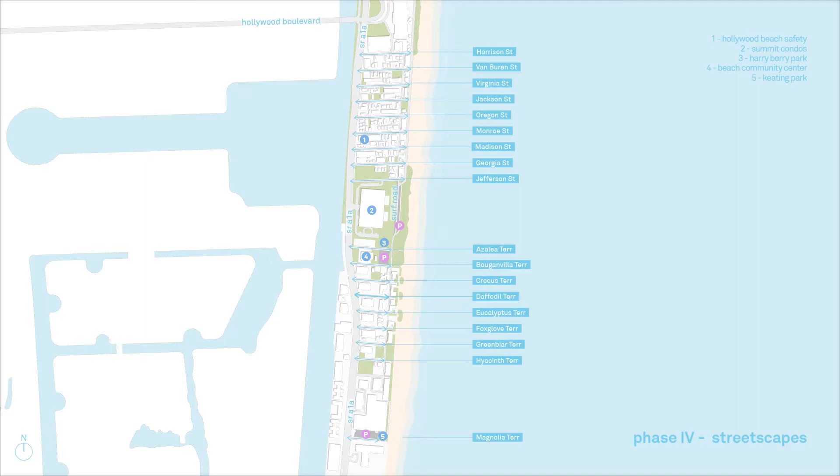Hello and welcome to the Daffodil Terrace undergrounding of overhead utilities and streetscape beautification conceptual design. In this video, we will be highlighting the upcoming changes occurring on this street during the Phase 4 undergrounding of overhead utilities and streetscape beautification project.

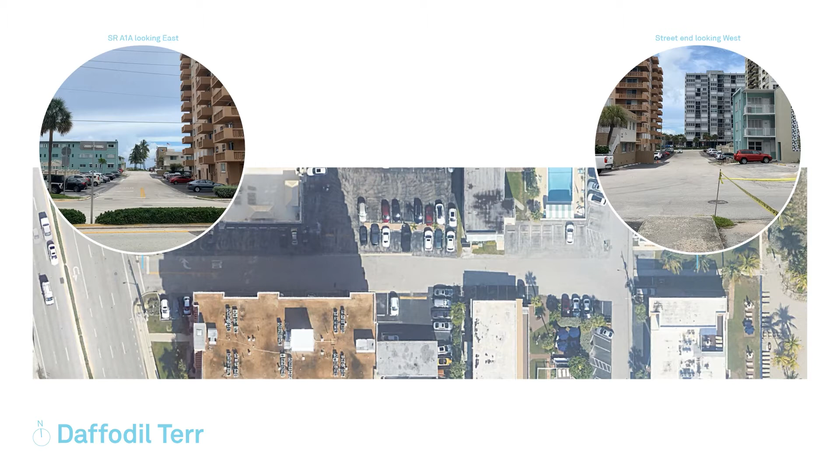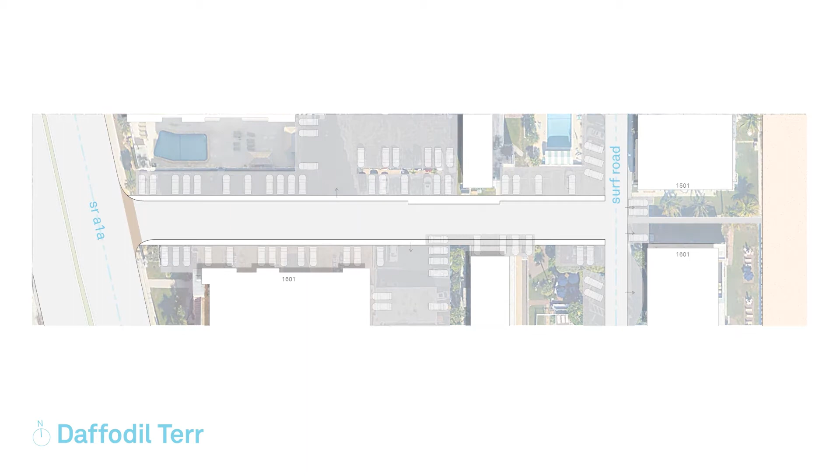These images illustrate the existing conditions both at the street and the street end. The information provided is based on conceptual designs and is subject to minor revisions during the engineering, regulatory, and construction design phase.

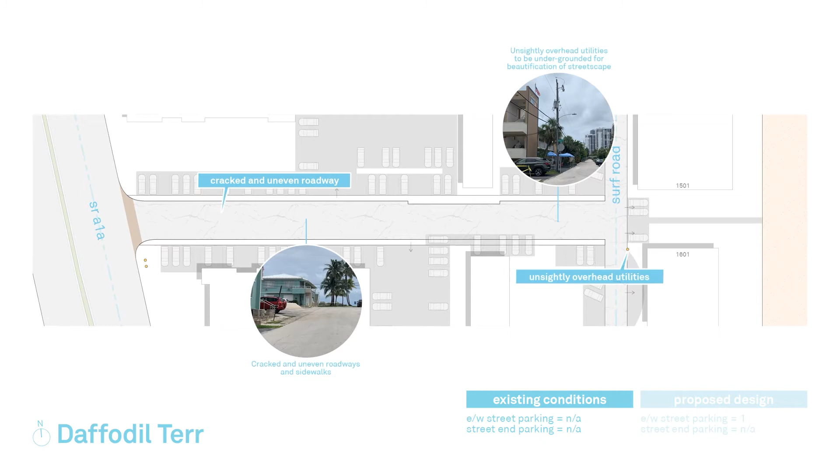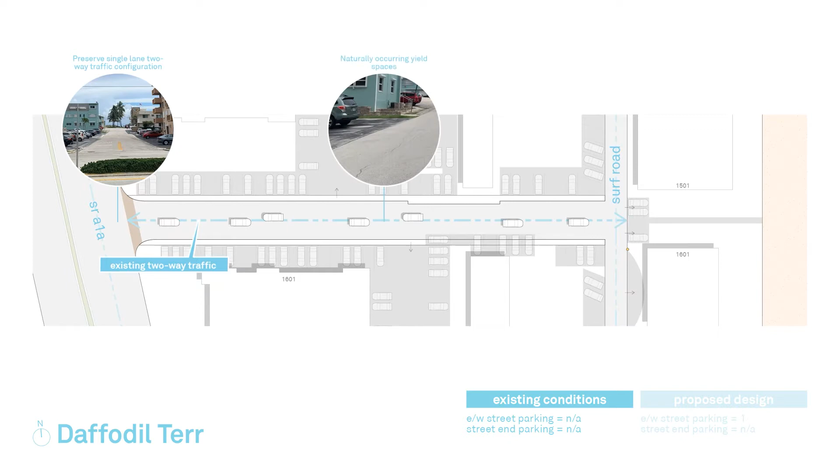Due to the nature of implementing the undergrounding of overhead utilities and streetscape beautification, the parking spaces, regulatory agency oversight, public lighting, and landscape improvements will be markedly different than the current conditions as seen today.

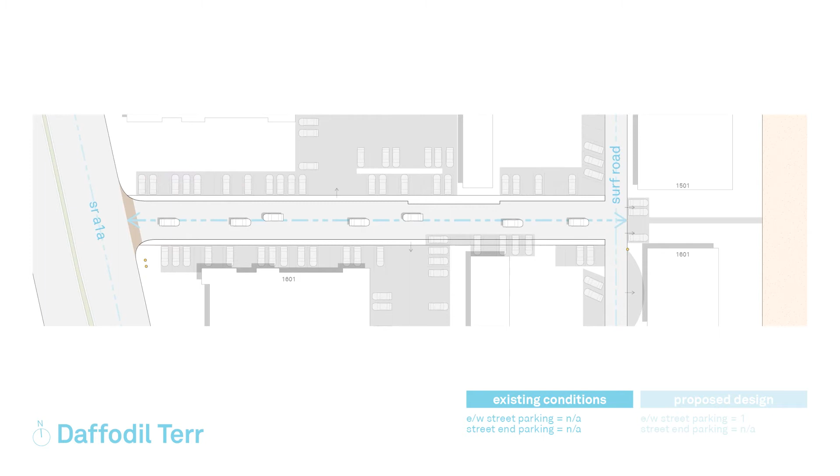Each street is a custom design based on existing conditions. The proposed design will incorporate newly constructed sidewalks and roadways with brand new paving that will extend onto the street ends.

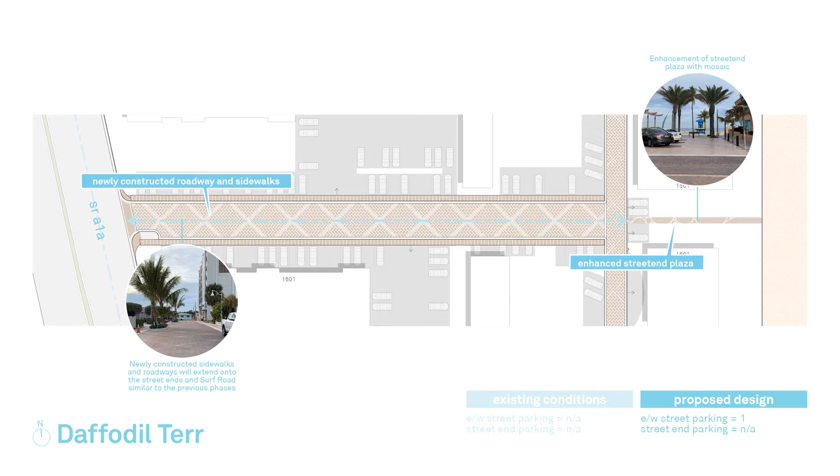The photos shown depict images of the completed streetscape from previous phases 1 through phase 3 and are an example of the same types of lighting, hardscape, landscape, and streetscape improvements that will be implemented on this street and the entire phase 4. As requested by the community, the current traffic pattern is being maintained, i.e., the two-way traffic with

a single lane in each direction and parking on both sides of the street.

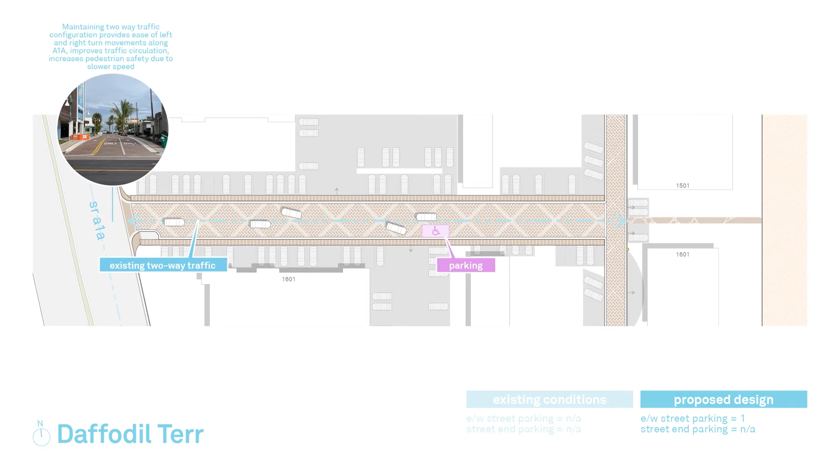Existing driveways will act as natural yield spaces, an area where a car can pull into to allow another vehicle to pass by.

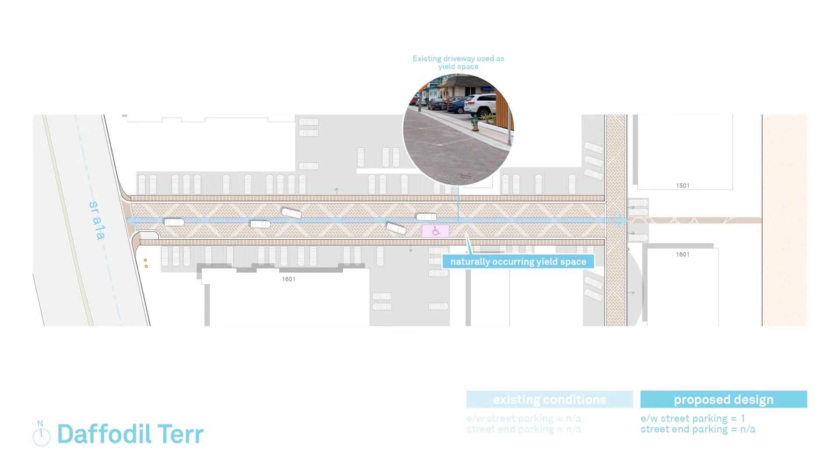Encroachments into the row have been addressed by the city passing an ordinance reducing the amount of space required on a private property for parking, i.e., if there is 16 feet and 0 inches in a perpendicular configuration and or 8 feet 6 inches for a parallel parking space, then these spaces will continue to function as parking on private property.

In addition, if private property owners have wheel stops or small garden walls which can be reconfigured to allow for additional private parking, CRA staff will meet with those private property owners.

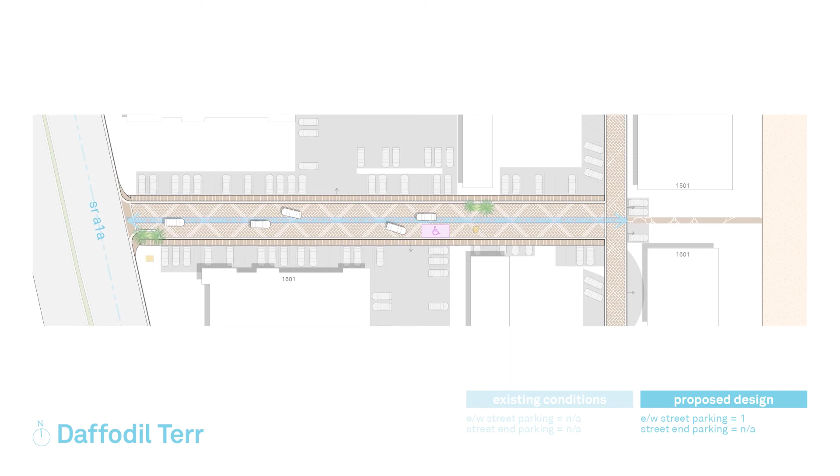The undergrounding of overhead utilities will result in utility transformers that will be placed in strategically located landscape islands to optimize service points to adjacent properties and minimize the loss of public parking spaces.

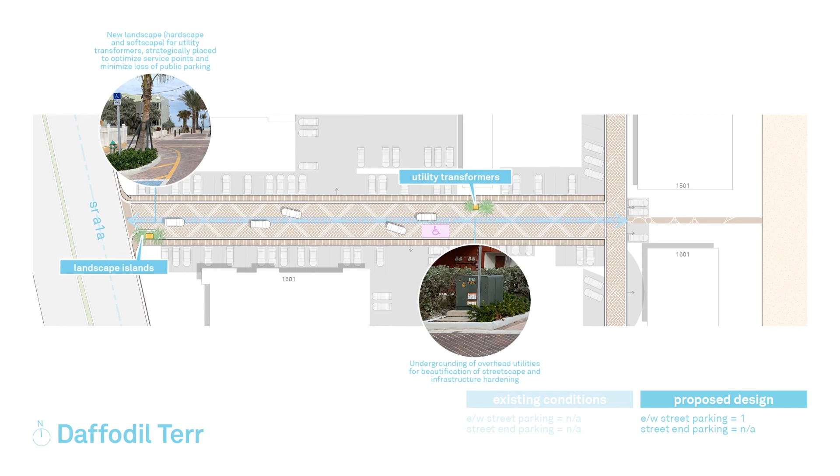Street lighting will also be upgraded to LED marine turtle-friendly lights as seen in the previously completed streetscape projects from Tyler Street to Thomas Street and Iris and Jasmine Terraces.

The design of each street maximizes retaining as many public parking spaces as possible, while dedicating the areas needed for transformers as part of the undergrounding of overhead utilities. For Daffodil Terrace specifically, these regulations allow the addition of 1 new parking space.